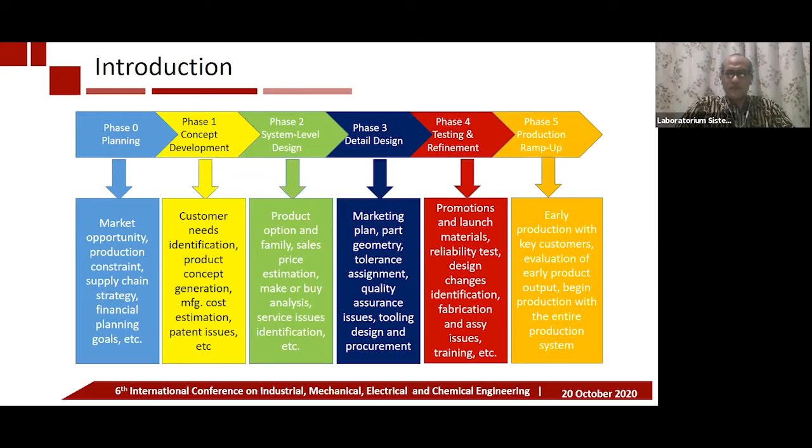In this slide, I will focus on the general product design and development methodology taken from the book written by Ulrich and Eppinger. As we can see in this slide, product design and development consists of 6 phases. Start with planning in phase 0 and then followed by concept development, system level design, detail design, testing and refinement, and will be closed by production ramp up in the last phase. From those 6 phases, we will focus more on the detail design phase.

In the detail design phase, a designer should determine a set of certain quality characteristics in the form of dimensional and performance-based characteristics. A subset of those characteristics will be assigned as the product's key characteristics, which must be controlled during the manufacturing process. Then it is important to develop a framework to integrate the decision process in product design stage and manufacturing stage in order to improve the decision-making process and the use of time and other resources.

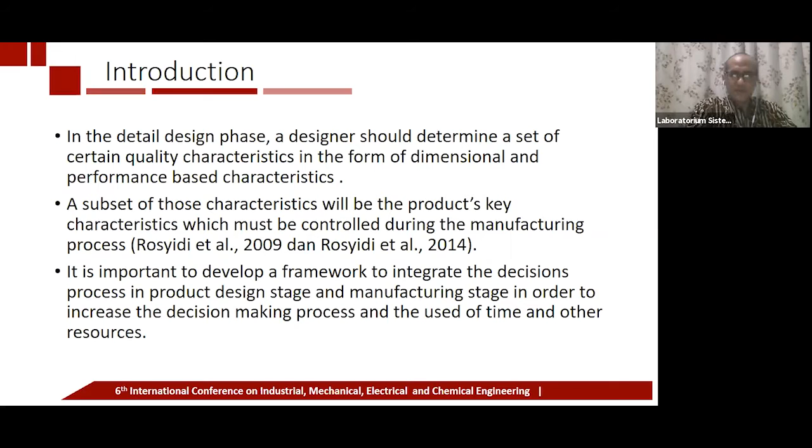In the detail design, a designer has to determine the geometry of components and tolerance assignment. Tolerance has been known widely as the connector or bridge between engineering design stage and manufacturing stage. In engineering design stage, the tolerance assignment will have some consequences to the product, such as performance or quality, sensitivity, robustness, and customer satisfaction. While in production or manufacturing stage, it will affect manufacturing costs, assemblability, process capability requirements, the requirements of operator skills, and the number of scrap and rework.

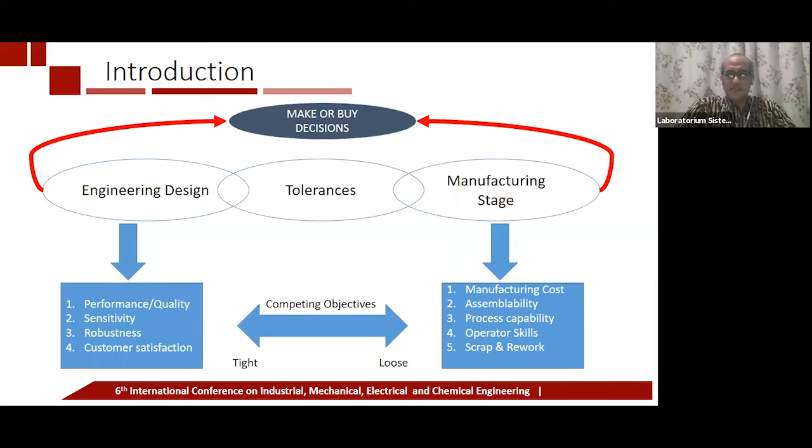With such consequences, the tolerance must be set tighter in design engineering stage, while looser in manufacturing stage. Thus, the tolerance has to be set by considering both stages simultaneously. There is much research discussing optimization model development to determine the optimal tolerance. Generally, there are 2 approaches in tolerance modeling. The first is the continuous model approach, and the second is the discrete model approach.

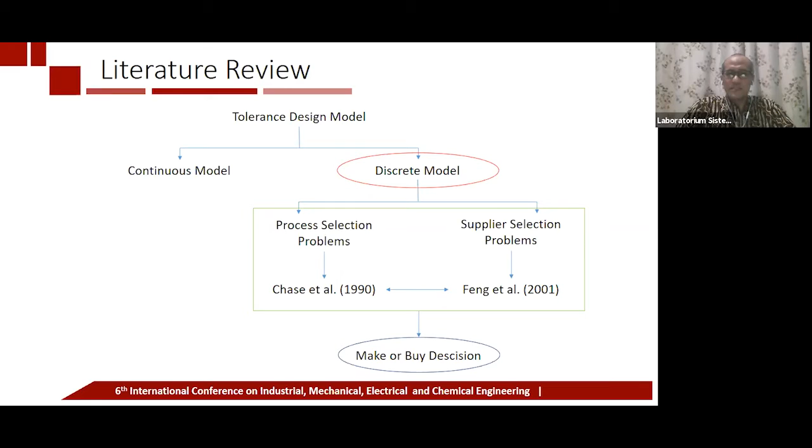In the continuous tolerance model approach, the tolerance is treated as a direct decision variable, while in the discrete tolerance model, the optimal tolerance is found through process selection, such as the model developed by Chase et al. in 1990, or supplier selection, such as the research developed by Feng et al. in 2001. Those studies assumed that the manufacturer fulfilled all the needed components exclusively in-house or outsourced to the suppliers. These assumptions can be relaxed by making the manufacturer fulfill the needed components in both ways. The decision concerning this issue needs make or buy decision making.

Several studies have been conducted on integrated decisions of engineering design stage and manufacturing stage through make or buy decision making. Make or buy decision making mainly consists of two decisions: process or supplier selection and order allocation to each selected machine and/or supplier. There are also some considerations in the decision making, such as quality improvement activities consisting of prevention, appraisal, and failure, simple sequencing and delivery lateness, make-to-order system, learning and forgetting considerations, offline learning, and sustainability considerations, consisting of remanufacturing, the inclusion of carbon emission, and how to use energy efficiently.

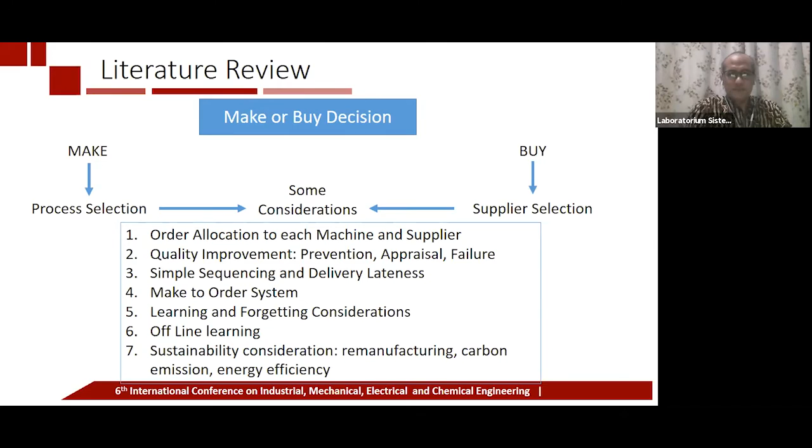We found an interesting model developed by Wang et al. in 2016, which can be integrated with the existing model of make or buy decision making. In their research, Wang et al. used the Bass model to determine the number of returned products in one product generation and extended their work in 2017 with multiple generations.

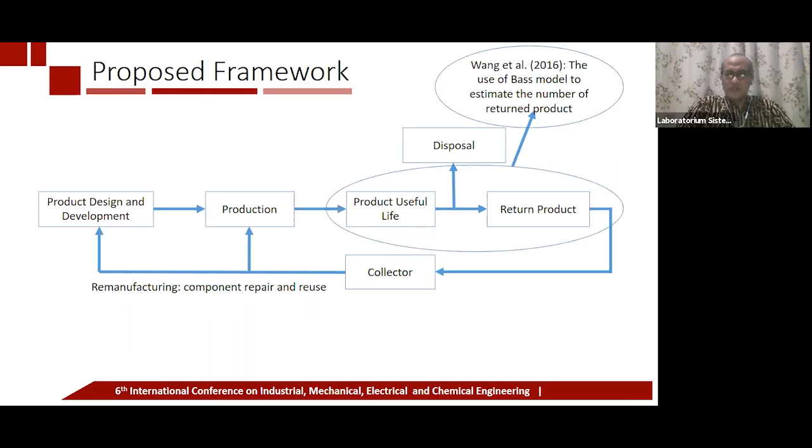The general reprocessing operations in Wang's model include disassembly, cleaning, refurbishing, and testing for quality control. They also consider one component in the collected end-of-life product and then focus on the collection and reprocessing operations, and also calculated the cost saving, which comes from the difference between manufacturing new items and remanufacturing items,

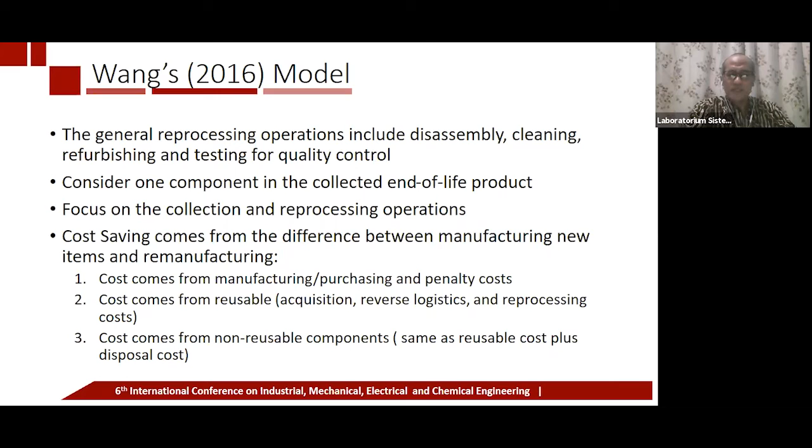which consists of three costs. The first cost comes from manufacturing or purchasing the new items and also includes penalty costs. The second cost comes from reusable items, which include acquisition, reverse logistics, and reprocessing costs. And the last cost comes from non-reusable components, whose cost components are the same as reusable costs plus disposal costs. These costs are then used to calculate the cost saving from the difference between the cost of manufacturing new items and remanufacturing items.

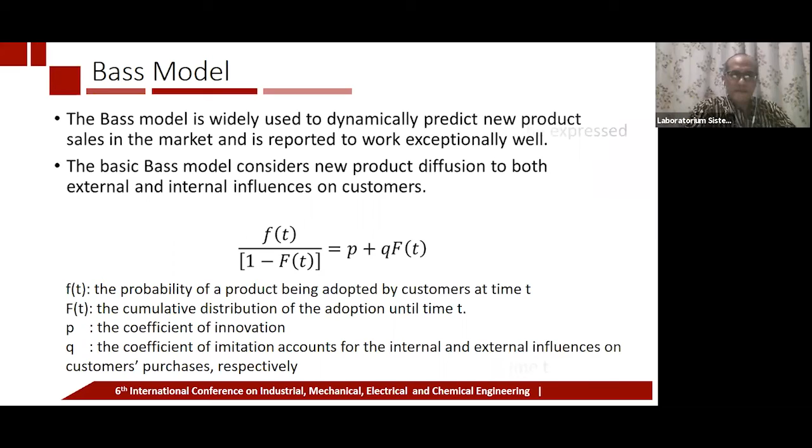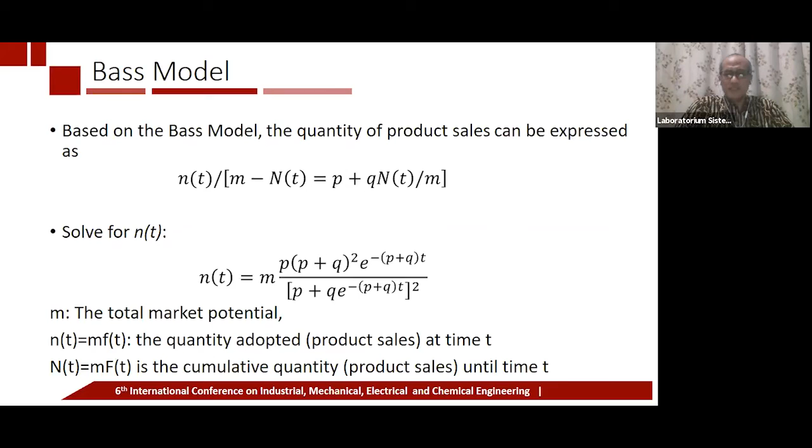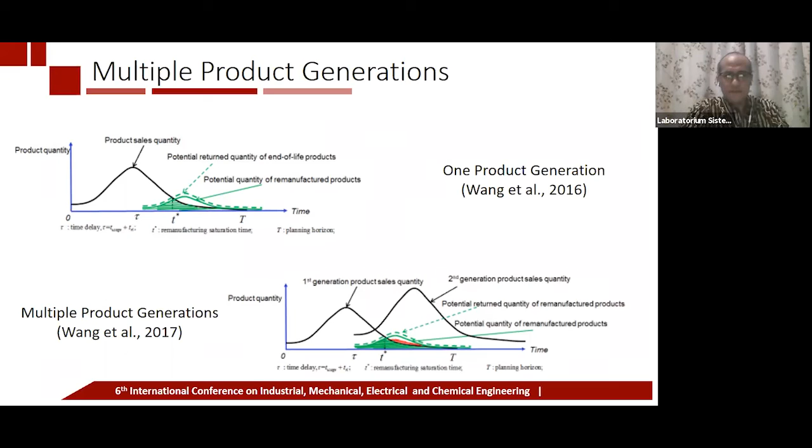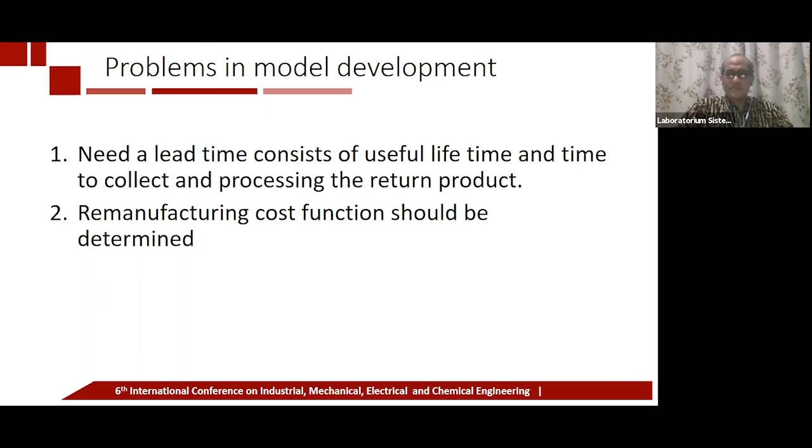And we conclude this talk. First, we reviewed the literature on integrated sustainable make or buy decisions, specifically the ones that make simultaneous decisions on product design and process and supplier selection, along with its order allocation. Second, we described the opportunity to include the Bass model in make or buy decision problems to allow sustainability consideration based on the Wang et al. model. And the last conclusion, we identify some problems in model development.

First, how to account for the lead time coming from useful life and time to collect the returned product, and also the representation or expression of the remanufacturing cost function in its relation to tolerance assignment.